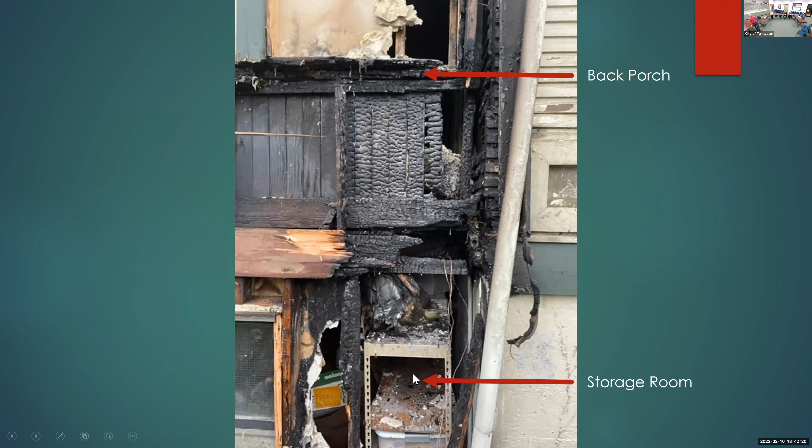So a closer look at the rear part of the fire damage. You can see there's a shelf right here, a shelf unit inside that storage room that had stuff stacked on it, because the wall's gone. The floor to the back porch is right here, the back porch wall, outside.

So this is the bulk of the damage, the floor joists as well as electrical. Again, just another view of that.

We had our staff—part of what we do in our department is also take care of all the city facilities, this building, city hall, these houses. So our facility staff responded that day, even though they had planned not to work on the weekends. They rallied and helped us out and came down and secured the house.

All 4 doors of the house were broken in by the fire department. That's how they do it, they bash in the door so they can get in quickly and assess where the fire is. So they secured all the doors because all the jambs were broken, and then they boarded up the house.

I took a picture of that corner, what it looks like. By the time I got there, it was boarded up.

Okay, so this is the back porch room. And this is where it was boarded up. So you can't see outside, but had it not been boarded up, you would see outside of that wall, out to the grass.

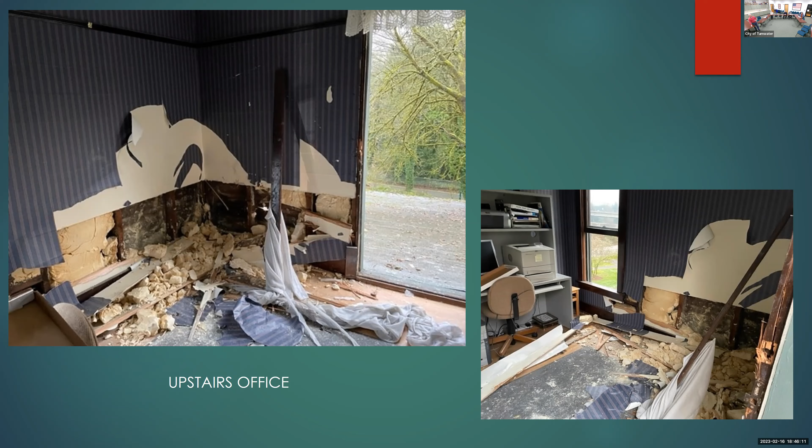So what we did, we wrapped it all up that day. Next Monday, we met with the city administrator and the mayor to do an emergency declaration, repairs, and what that does is it just greatly speeds up our process so that it takes out the requirement that we bid the project, which takes a month or more to go through that. So it allows us to go out and pick a qualified contractor to come in and help us start to fix this. So we also met that day with...

WCIA, Washington Cities Insurance Authority, which is the city's risk provider. We're in a risk pool of cities. They came down and met with us, and they've since met with us again on site to talk about what we can do and how we can do it.

Our insurance coverage, we have $1 million of coverage on the house, both for structure. We have $1 million.

And then we hired Heritage Restoration out of Chehalis. They do this with buildings. They came recommended from WCIA, so we feel pretty good. We just finished the contract with them.

Sam Osborne did last week. So this week, I met with them on site, and we went through the scope of work and the first phase of what they're doing in evaluating the house. So things are just starting this week, and then next week, we're going to start pulling things out.

So the way it's going to go is almost everything on the first and second floor is coming out of the house and going to their storage facility to either be cleaned or ozoned or whatever we have to do to get it clean, because everything in the house smells like a campfire.

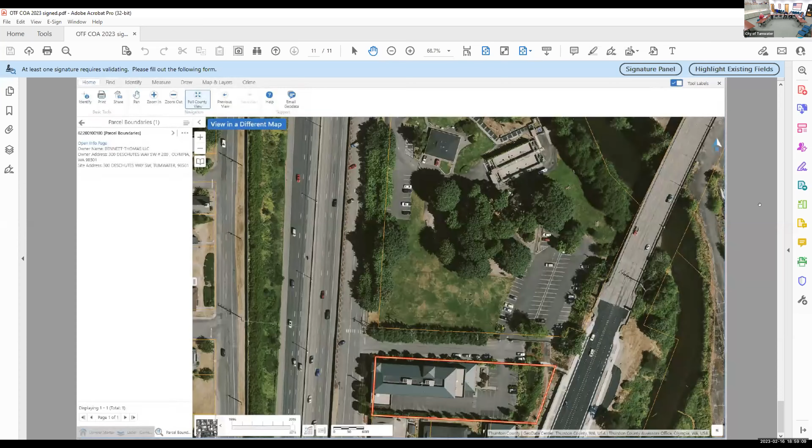Well, first of all, I want to voice my concern for the brewmaster's house, because that's my greatest fear at the Schmidt house, is having someone torch it or get inside and vandalize it with graffiti. We have had several break-ins on the Schmidt house in the past few months. Luckily, we have a good alarm system and good cameras, which cost us over $50,000 to implement over the years. But it has proved beneficial, and the Tumwater police are very good about arriving quickly. I don't know why, but the transient activity has picked up the last week or so. I don't know, maybe it's because they're moving them out of their camps along the highways in that area. I see them every night, coming around the house, walking through it and looking at everything. So I'm still in fear of that happening.

So I'm sorry that happened to the brewmaster's house, but like Chuck said, what are you going to do with a guy? Someone wants to come up and light something on fire, there's not much you can do to stop it. Just react. So anyway, we'll do what we can to help out with the brewmasters.

I don't know if Chuck has announced this or not, but Megan Ackerman has left to take another job, so she's no longer with the foundation. But we have hired Ed Eckley, who is another historian in the area. Chuck met with him last week or earlier this week, I can't remember. He seems to be a good guy, a good fit, has lots of social media background, and is looking forward to helping out.

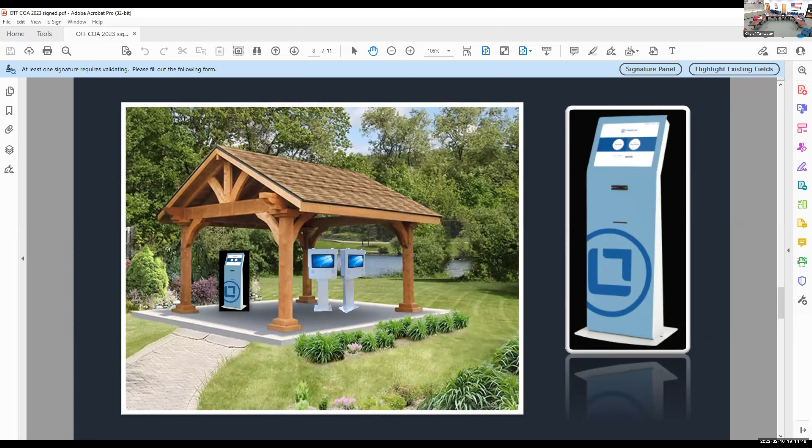John, how soon will this get done? Well, it'll take 3 months or so to ship it, and after that we plan to have it up by summer, by the start of summer. Let us know when you have it, so we can have a big party. We might put a keg in there too, but do I need an amendment for that, kegerator?

Anyway, all right, thank you very much. You're doing a good job. Well, thank you everybody, and sorry about the brewmaster's house again, but I feel your pain, so. Anything we can do to help, counting on you to take care of it. Yeah, anything we can do to help out the Foundation with anything at the brewmaster's house, we're happy to do that. We appreciate it.

Just a quick update, we are renovating the Schmidt House and really revamping the archive rooms downstairs. We got a grant from the Washington Historical Heritage Fund. It's going to be climate controlled, and it's going to have fire prevention throughout the whole house. So we can give you some lessons learned on that after we put it in. When are you going to have it finished? Hopefully by June.

Okay, so June for the Schmidt House, and how soon for the kiosk, that summer as well? Yeah. And then we got the park, maybe we're still talking about. Okay, yeah, when you have the house open, I'm sorry, what? Maybe we can have a meeting at your Schmidt House sometime after you get it all completed and furnished and what have you. Yeah, absolutely, we'll give the grand tour. I also wanted to point out real quick that when I read the minutes before the meeting,

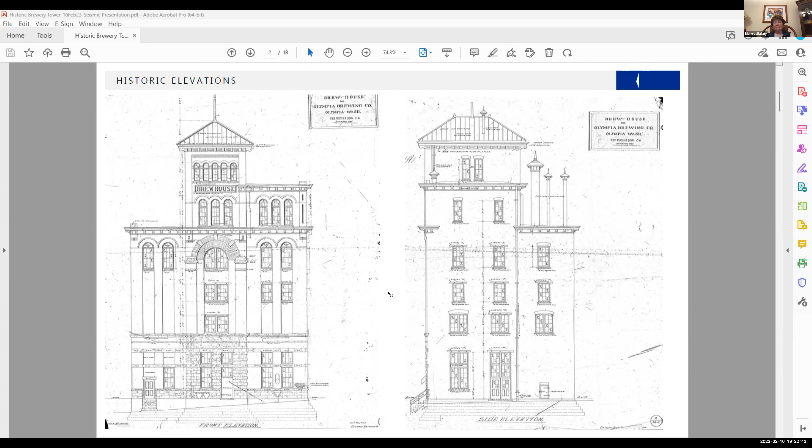These were the building elevations, and we've pored over these drawings quite a bit, even recently, just to understand how the building was put together. We'll spend a lot of time today on the areas at the bottom, the foundations. These were probably designed in Milwaukee for a site they knew would be a masonry building, very heavy. So these pyramidal shaped footings were common for displacing that weight onto compacted soils.

That's not what we have though here in Tumwater.

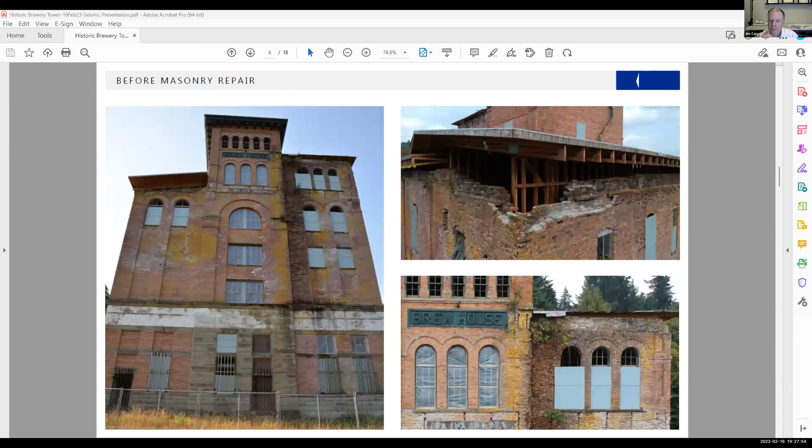So what we think happened - I'm going to scroll back to these drawings - they anticipated hitting suitable soils, or they would have anticipated hitting bedrock, the basalt, which as I'm sure you know, is what creates the falls right there. There's a big plug of lava rock, and I think they anticipated hitting that lava rock as a suitable base for this heavy masonry building.

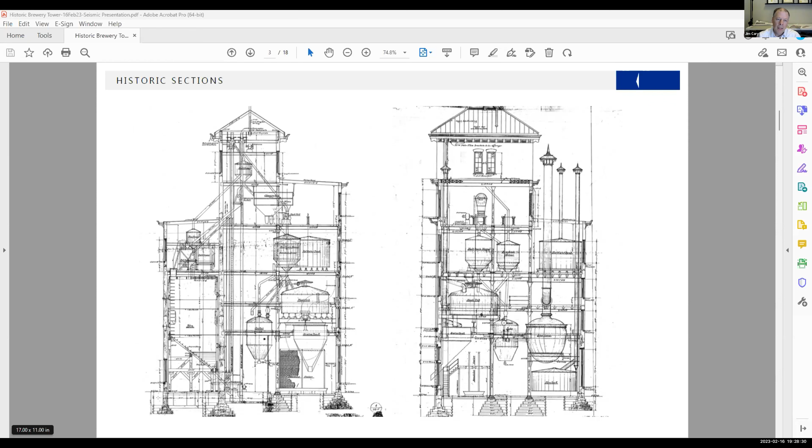Going back, they would have started digging a hole, basically the space for this building. They dug down, and in 1905 they might have been using steam shovels - I don't think they would have been doing this by hand. They dug and got down probably about 8 feet, and they ran into a lot of groundwater, which is the groundwater that is in the crawl space.

Now, they dug more, and they hoped they would have gotten to the basalt, but they didn't make it, and they couldn't keep up with the amount of water down there. So this drawing is a hand-drawn drawing that is in the archives of the Tumwater Foundation. They kindly dug through, and we located this, and this is the holy grail of this project.

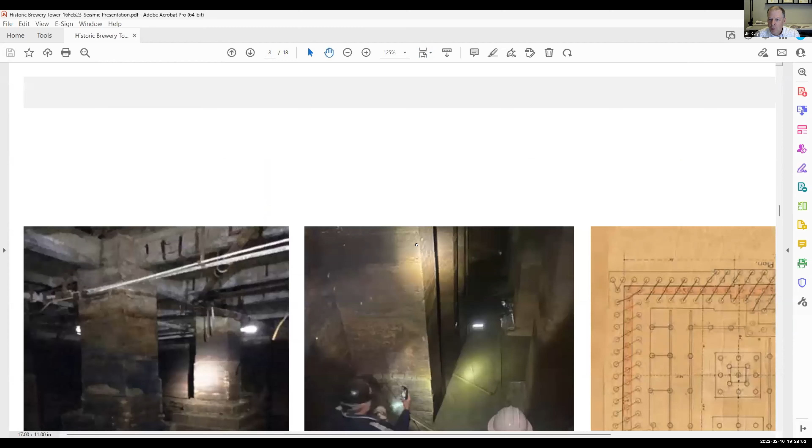What it shows is the foundation plan as drawn in Milwaukee. I'm going to zoom in - hang on, give me a second. It's supported by about 490 piles, and these piles have a line drawn across them. This is like a linking piece of steel across these piles.

They just got to a point where they couldn't keep up with the water, and they realized they needed to support this building in this location. So they came up with a piling plan - these are likely Douglas fir trunks of trees. They would have been driven down to resistance, so they drove them down until they hit basalt. What's interesting is, based on our geotechnical borings, these piles are probably only about 10 to 12 feet long.

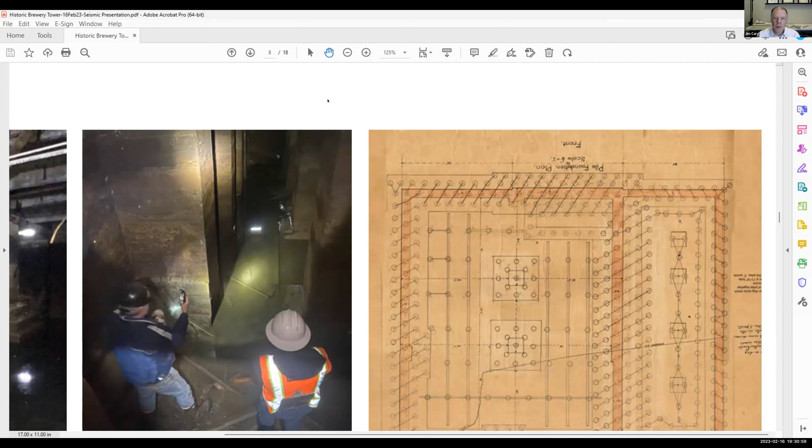So they have this hole filling with water, they drove piles, then poured the concrete foundation on top of those piles and continued with the concrete and finished the building on top. This has significant consequences for the seismic mitigation we're anticipating for this project. This was a big day for us getting down there, measuring what's down there, seeing the underside of the structure from below, and seeing all these piered foundations sitting on top of the timber piles below.

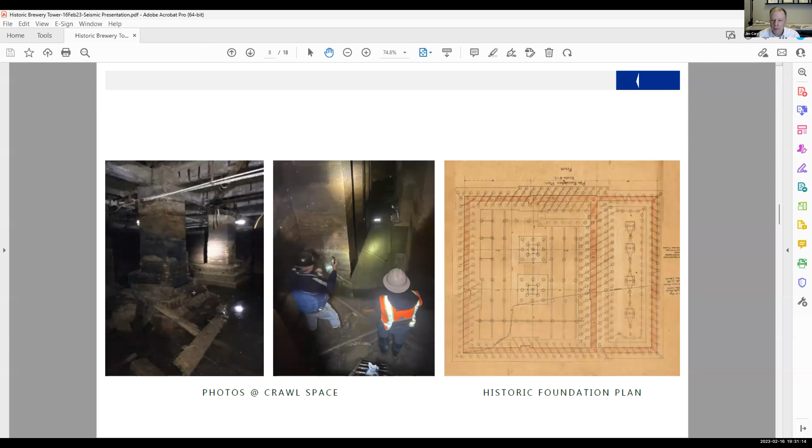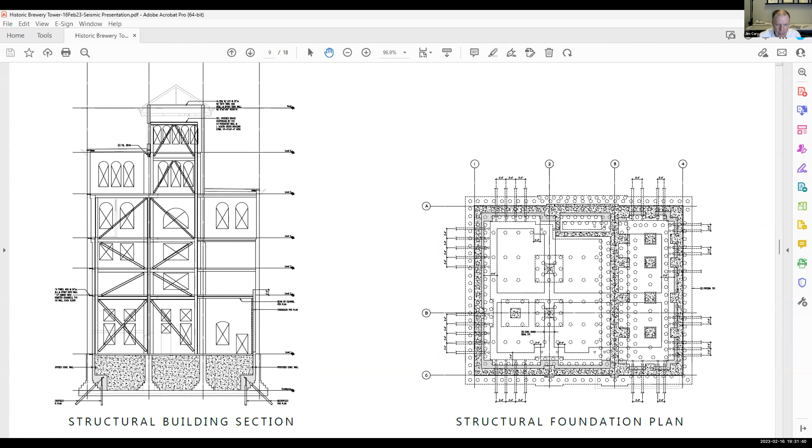So these are the new structural drawings. I'll zoom in on the section here, give you a closer view. This is the building section on the left, and what this shows is this crawl space - this is where we were standing down below, about 14 feet tall. It shows the foundations and this big mat slab they would have poured on top of it, and starts to show the structural changes we're anticipating making to make this building safe to occupy. The plan over here is the foundation plan again, showing all these timber piles below.

And then you can start to see these pieces here. These are new, they're called micro piles, and they are cored with a casing, and then they drill until they hit resistance, which will be the bedrock down below, and filled with rebar and concrete, and then capped and tied to the new concrete that we're attaching to the inside of that crawl space.

So what we'll do is drive these micro piles, some vertical, some diagonal. We'll pour concrete in the crawl space area, not fill it, but along the walls to create shear resistance. That concrete will be tied into new concrete walls on two of the tall floors at basically the ground level. And then from there, we will use a series of steel members that go up through the structure up to the top of the tower.

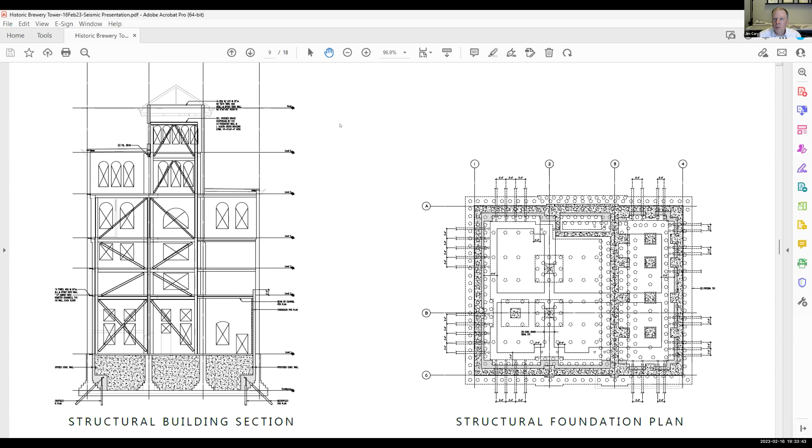This is the sort of standard way that we do seismic mitigation design, by collecting the shear forces at the base, getting tied into the ground below, and then using steel members to absorb the forces that continue up through the structure. And I'm going to switch to a video here briefly.

I like to use this as an example of what we're working on. So this is not meant to look like the tower, it is a structural representation of the tower. And if you put it in motion, it starts to show how the building reacts.

One of the things that we're working with is this space here at the bottom. This is that tall brewery floor. I'll run it again here. And you can see there's a lot of movement there. And then there's just this heavy masonry mass at the top that moves back and forth.

So what we'll be doing is capturing all of that energy down here at ground level, and then using a concrete and steel structure to absorb that force and make it so that heavy movement does not overwhelm the existing masonry and our new structure inside.

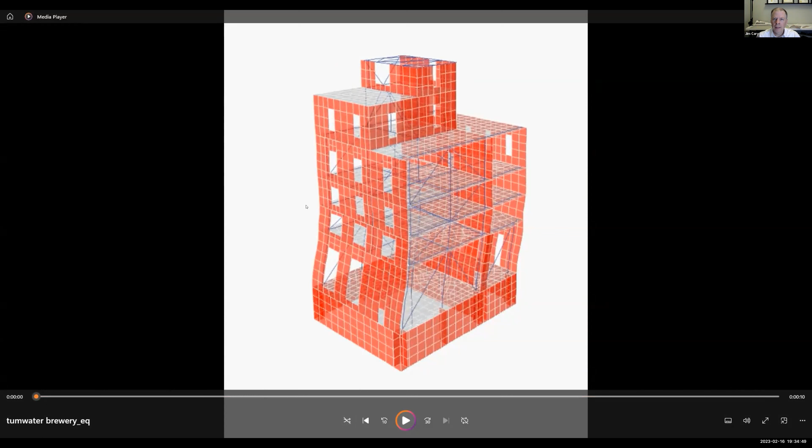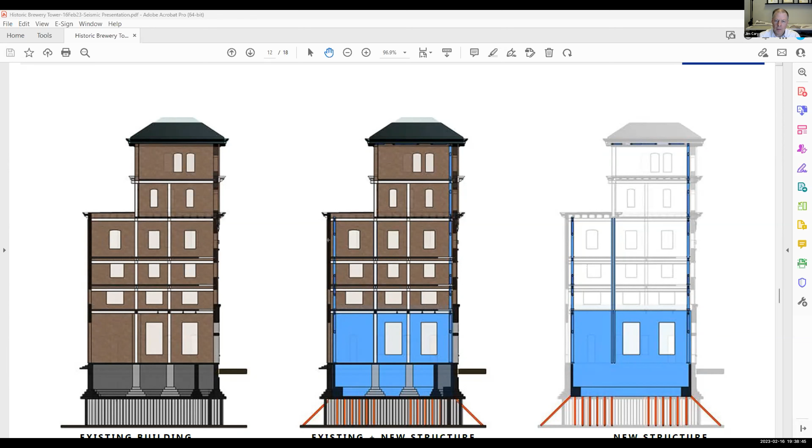And then structure going up the north wall, structure going up the south wall. This drawing is looking at... let's double check here. This is looking at the south wall, the back of the south wall, with concrete here, crawl space, concrete here, and then framing going up, that with some struts up at the fifth level.

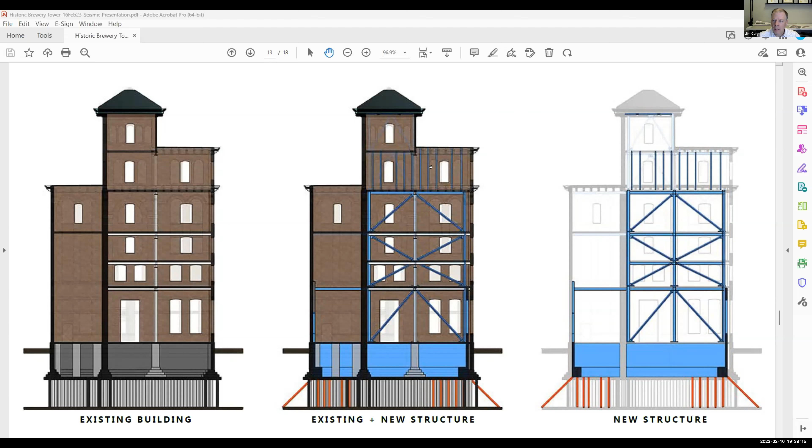And then this is looking at the back of the east wall. So looking east, this is that tall room where the grain storage was. And once again, concrete going up about half of that wall, concrete down in the crawl space, and then micropiles below.

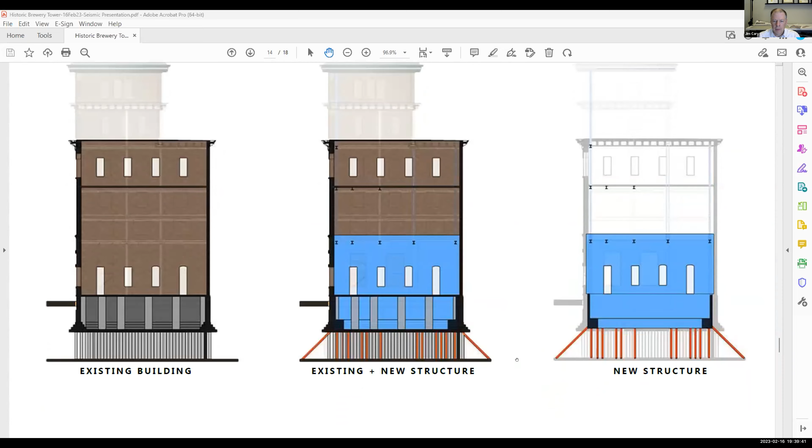Yeah, I think that covers the scope. This is relatively standard practice for seismic mitigation. You use concrete where you need it, reinforced concrete where you need it, and then steel structure to absorb the seismic loads as they accelerate up through the top of the structure.

The criticism that I would expect is that we have steel members that are crossing in front of windows. You can see them here at the sixth level at the top of the tower. This is at the fifth story. Once again, at the fourth story. And then as we go down through the building, these diagonal members cross in front of the windows.

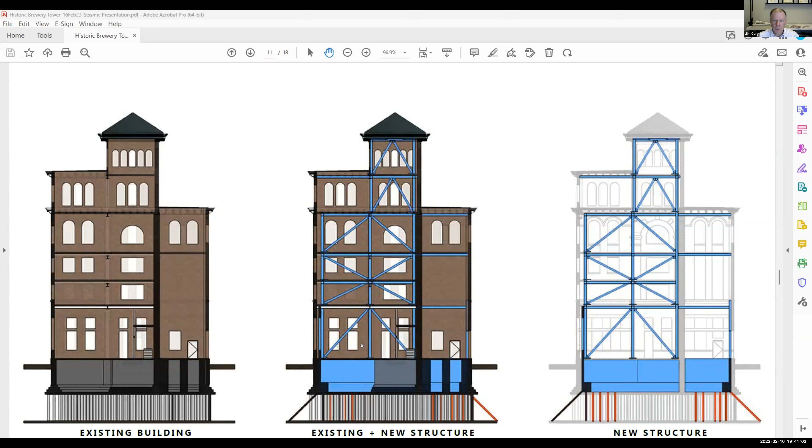This is typical seismic mitigation. There are ways to limit the amount of steel that crosses in front of windows, but it tends to increase the amount of steel that you use. It also increases the cost of the project. And we have shown this as the most efficient path to take those loads from the top of the tower down to the base of the building.

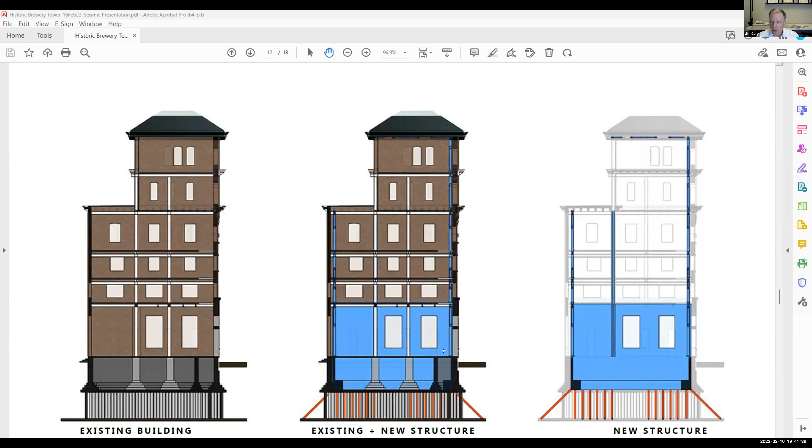The other thing that I would expect people to comment about is the use of concrete shear walls down at the main level of the building. Down in the crawl space, they won't be visible, and eventually the water will return and they'll be submerged again. But at this level, the wall of the west wall of the fermentation room would be a new concrete, reinforced concrete wall that was part of the structural reinforcing of the building. We also have that same wall on the east side of the building in the grain room as well.

So that is an introduction of where we are to date. We're at, I think technically the architects, my office, we're at the end of schematic design. The structural engineer had to go quite a bit further in his work just to get to this point, where we can analyze the forces, coordinate it with the geotechnical engineering, and get a design put together that meets the current building code.

And why don't I stop now and answer any questions related to this scope of the work, and then I'll follow up with what we're using as a placeholder for future uses of the building. We've done just a bit of design work to understand what we intend to do so that the structural engineering supports that and would not be in the way of future programming.

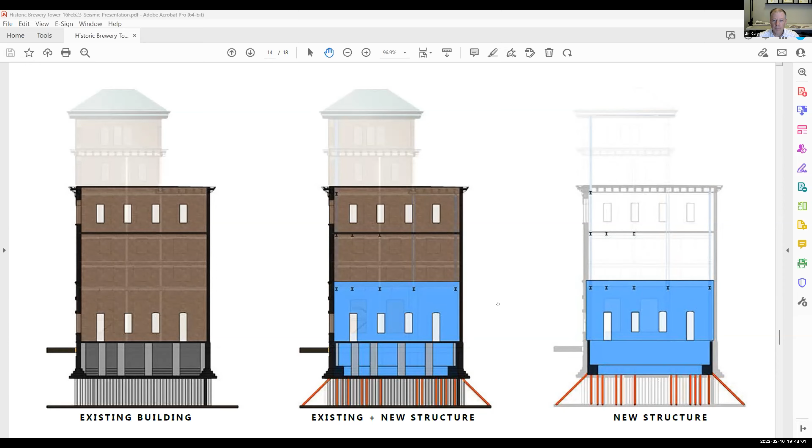Jim, if I was walking into your new structure after completion on the interior, what would I see? You would see the existing masonry building behind the new steel structure. The steel structure would be limited to the inside the north wall and inside the south wall. And you would see new concrete, reinforced concrete walls on the west side and east side of that ground floor.

So basically, I would see inside the tower or inside the floors an internal seismic structure holding up the building? That's correct. And the building is still technically holding itself up. This structure is designed to keep the building from, it's not going to tip over, but the forces of the earthquake accelerate through the building, and it would basically pull itself apart. The roof structure and the components, as you go higher up in the building, as the energy accelerates in an earthquake, would fall apart, and there would be parts.

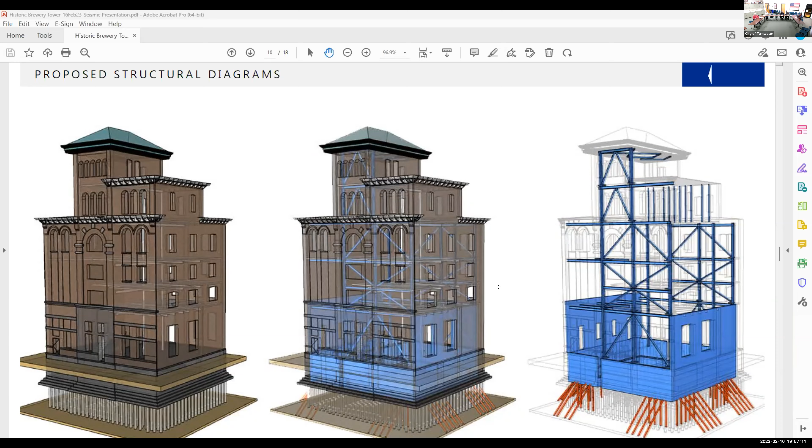I have a couple more drawings. If everyone wants to sign off, I'm not sure what time it is, but I've got a couple more drawings that are relevant if you're still on board. Can we have a show of hands of commissioners that would like to see just a sneak peek at what future use might look like from a building perspective? Yes. Yeah. Yes. All right.

So we're not trying to win this project with fancy drawings. What we're trying to do is explain, so I'm going to zoom out again here. We're trying to explain how this building works with the building code and how it would work for somebody to actually occupy this space.

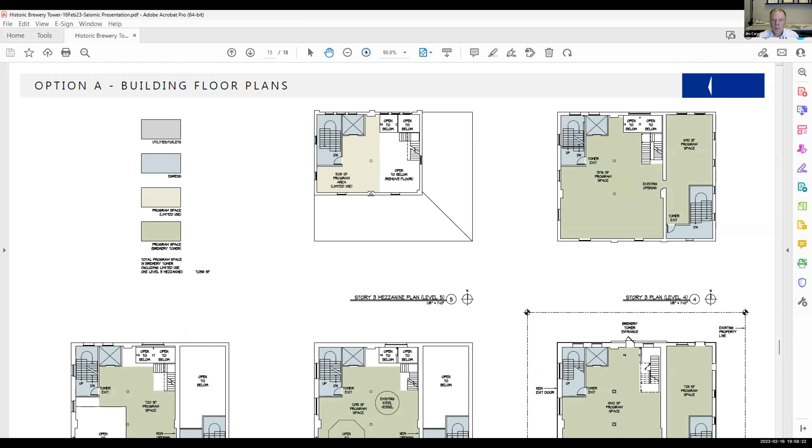So what these drawings hopefully illustrate is that it was a great building for vertical gravity brewing, but it does not work well for occupying it here in 2023. So this is the floor plan.

By the time we put in legal stairs that wind back on each other, legal stairs here and potentially an elevator here, the original elevator location is too small. We really start to eat up the floor plan and take away from the quality of the building space. We just fill it basically with access.

Moving up through the space on the second floor, we have to provide stairs and access through, and then bathrooms. There's very little building left by the time that we create all the things that turn it into a building for 2023. As you go up even further, it just becomes basically an access tower.

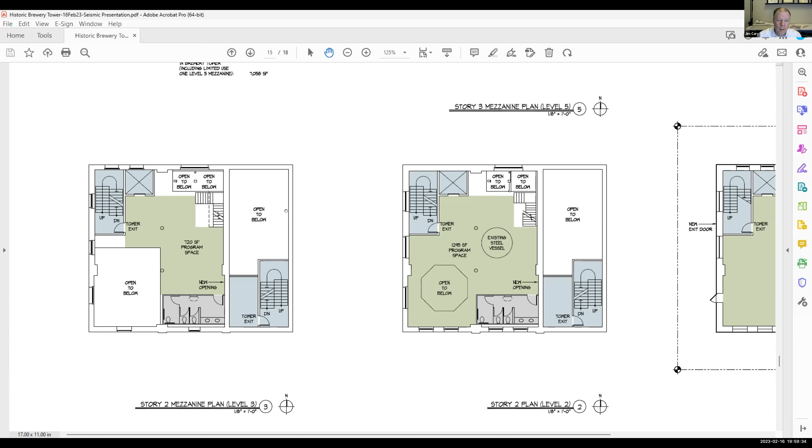So stairs in blue, green is available program space. These are existing openings in the floor. This is level 4. We get a little bit more space up here, but level 4 is technically the end of our legal stairs in the building.

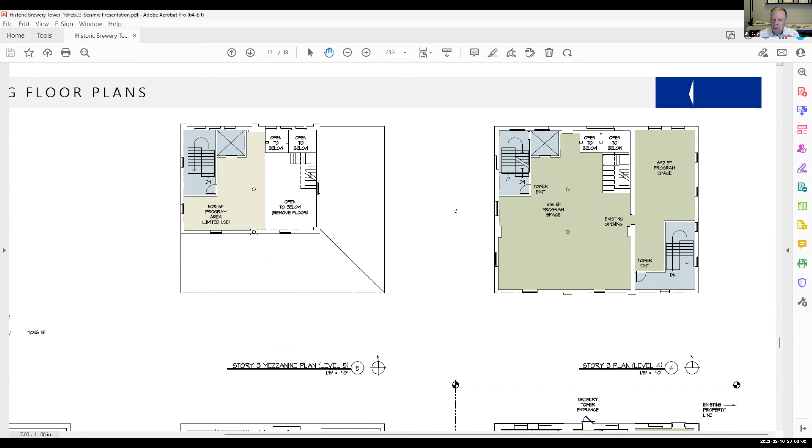If we include fire sprinklers and use the existing building code and the new building code, the current building code, we literally run out of legal access to these spaces in the building. So we're getting up towards the top of the tower now. So we did this drawing to illustrate that we're going to need to be more creative than just moving into this building.

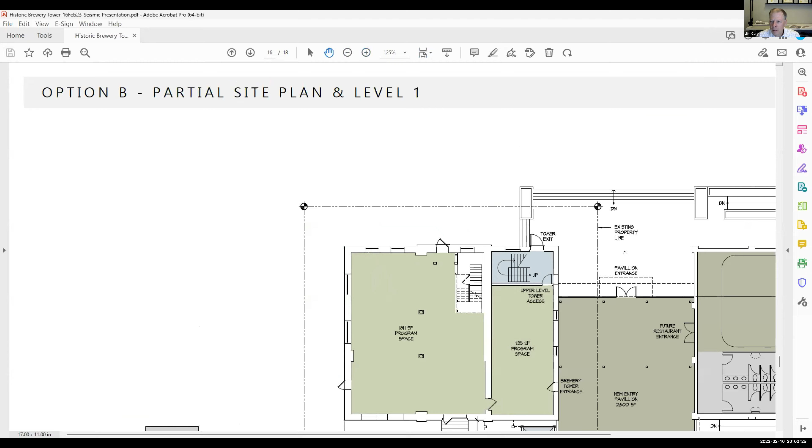So we did a second version that, zoom in again here. Sorry for the motion here. Let's situate it. This drawing shows the tower here on this side.

It shows one stairway climbing up through the grain room, and then an elevator and a stair outside the building. It shows the concrete structure that's to the east, off to the still to the east, staying put, and then we build an entrance pavilion that connects the two buildings. So here's the tower.

Capitol Lake is off to the top of the drawing. Here's the concrete building, the old warehouse to the east, and then we would build a connection here so that you would enter the building from grade here.

So climbing up from grade up to a pavilion entrance, enter the building, and then you would have access to the building to climb up either from the elevator or these stairs, and then we imagine this as a restaurant on this side, with bathrooms and kitchen. These bathrooms would also serve the tower so that we didn't have to use program space, which is limited over there.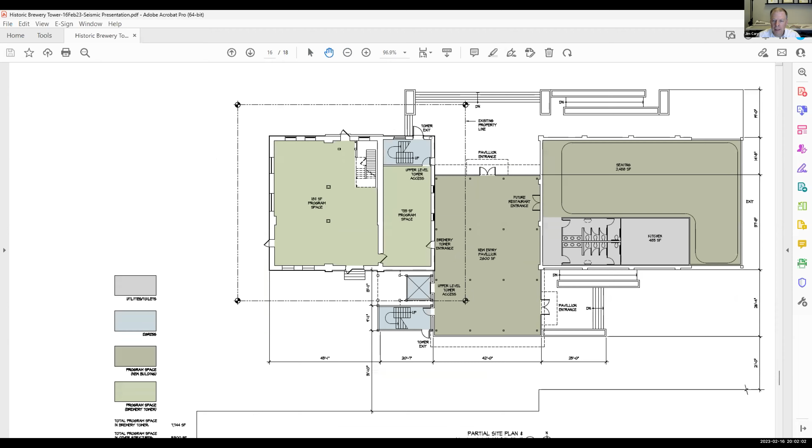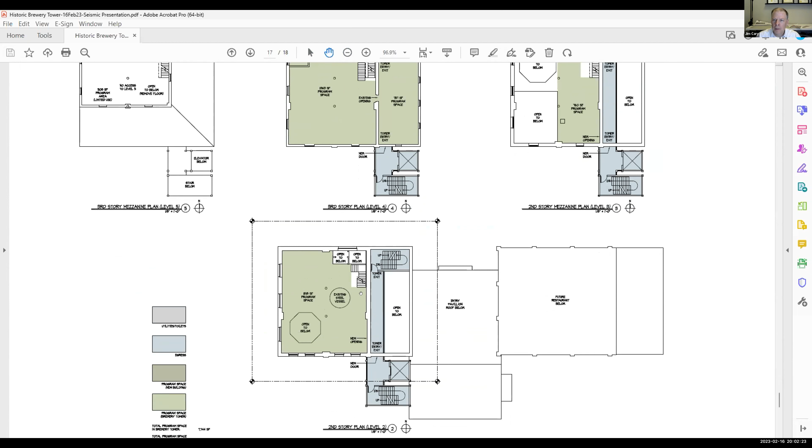And then it really, the amount of green space, which is the program space in the tower, we maximize that. So this is the ground floor of that. Climbing up through the building, you can see this is the second floor. This would be the access tower, so we'd have stairs here, elevator here, a walkway through the middle, and then we have a lot more program space available in the historic tower on that floor. As you go up, we maximize the amount of usable floor space within the tower. And then to help you visualize it, we did a 3D version again.

I'll zoom in down here at the bottom to start off with. So here is the building on the right, maximizing its open space and use. We would build a simple pavilion, likely a lot of glass, that connects the two. And this is the concrete building to the east that is possibly a restaurant. We would connect it all with the plaza to get you up to that grade level and into the building and then into the space on the right.

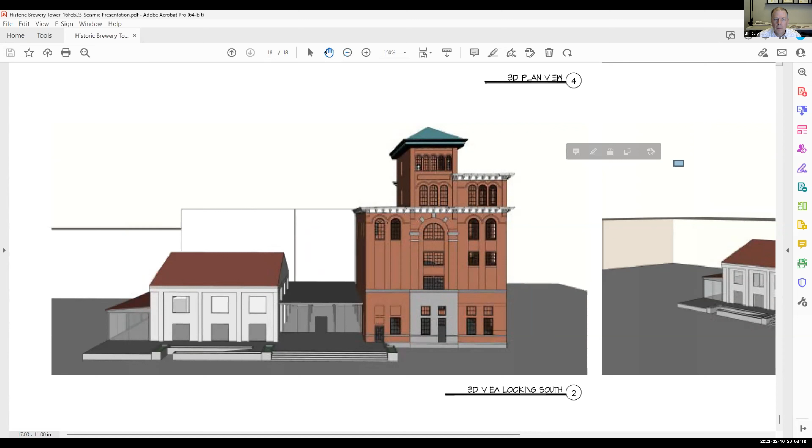Does the city now own the other building, or no?

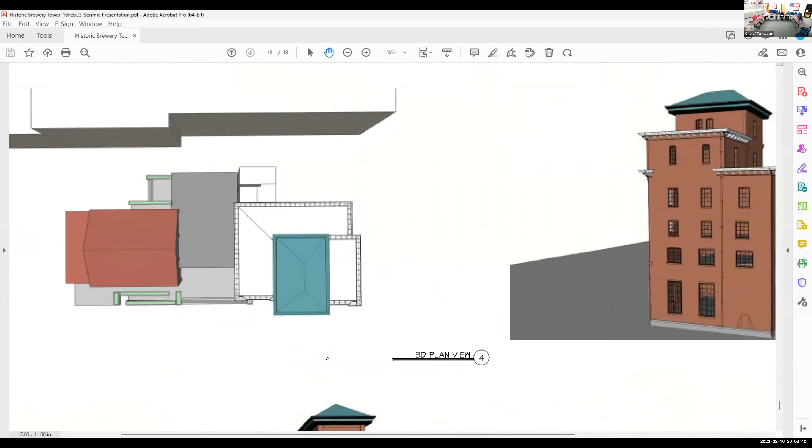Yeah, Jim, so it sounds like a great idea. Now we're going to have to concentrate on preserving and utilizing the tower. You got 10 million owners that want a whole lot more money than the thing is worth to build it into the warehouse area. But it's a nice idea, and it certainly makes the tower more usable. You haven't talked about accessibility to the buildings and parking, but that's another story. And what are you going to do about the springs that are in that Capitol Way area? I forget the name, where it's located for sure, but you have a lot of water coming out of the hillside there.

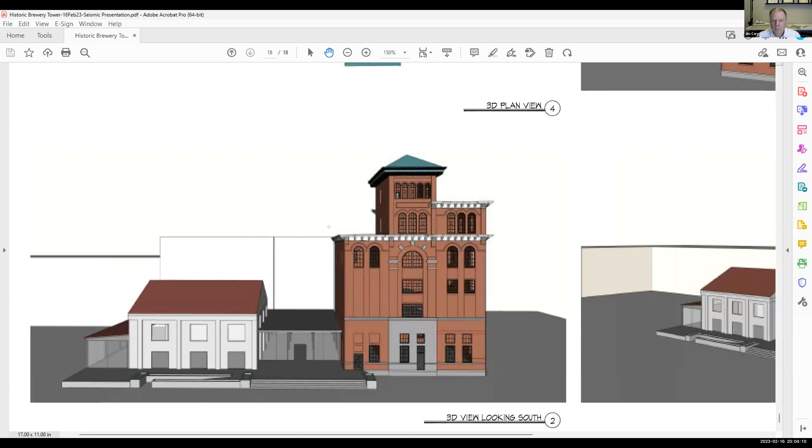So the reason that we did these drawings was to have a sense of the future of this project, so that the seismic work we're proposing is not in the way of that, and that it makes sense that the seismic work is in the right spot and doing what it needs to do. We just felt like we could create a plan for installing seismic mitigation into this building, but not without at least some sense of what the ending might look like. Without a sense of this, we weren't sure we were putting it in the right spot. So that's the whole reason that we did this scope.

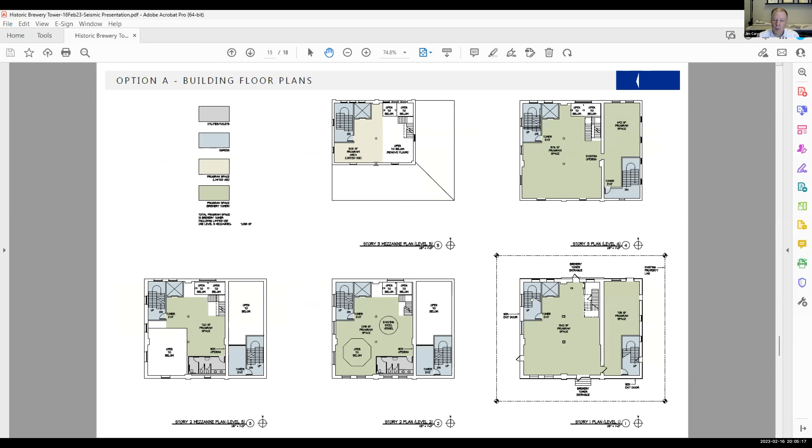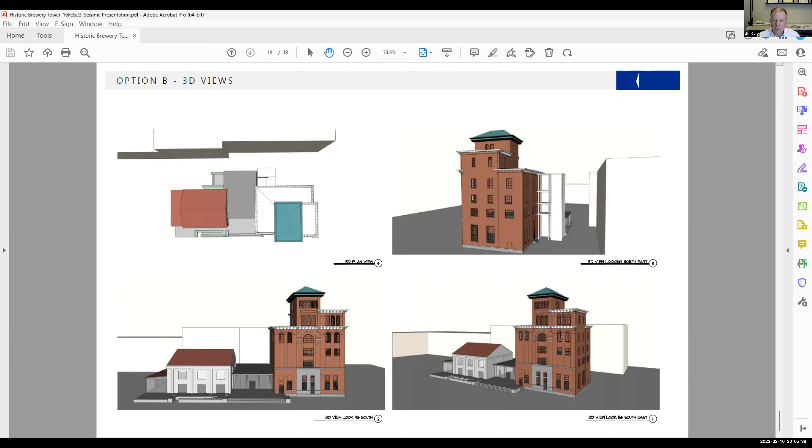I'm not trying to sell you on a new project, we're trying to just pay for the current one, but I did want to give you a sense of where it might go, so that we understand if we did want to do this type of project, we would want to know where all of these pieces were before we did that seismic work. With this type of project, we're a lot freer to put that seismic work in the right spot and know that we're preserving the building, making it so that there is a way to build this in the future. So that's why we did this programming scope.

I like the dreams. And Charlesford's great grandkids will hopefully see that and pay for it.

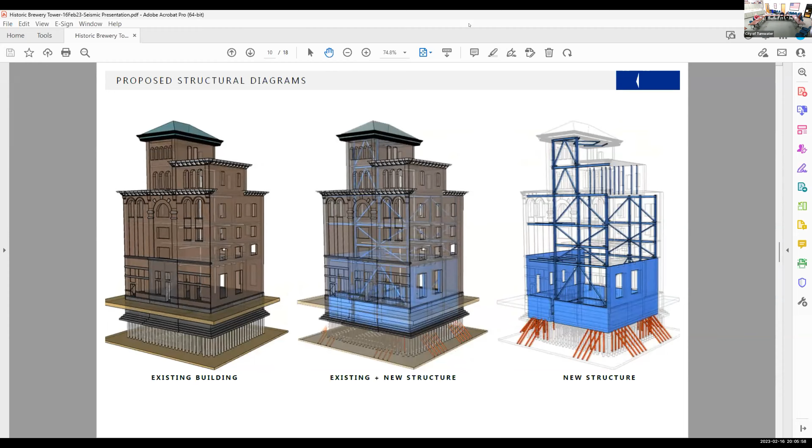Commission members, are there any comments or questions you'd like to make at this point?

Yeah, I'll go. Sorry, should I continue? Yes, go ahead, Alex. It'll be quick.

I just wanted to say thank you to Jim for the awesome presentation. Everything makes perfect sense, which I was not sure would be the case. I thought maybe this would get more confusing than that. I think the design is beautiful and simple and makes perfect sense. And I appreciate your forethought in coming up with questions that you thought would come up. I found that really helpful.

I'll just go ahead and speak to those two things super quickly. The steel in front of the windows is perfectly all right with me personally. But I think the discussion of the interior concrete was somewhat fruitful in this meeting. I too would lean toward preserving the actual tiles if possible. Otherwise, I had just a couple of quick ideas to put on the record. Maybe it could be a good place to show projections of videos for educational purposes, or perhaps the concrete could be stamped in a pattern that was suggestive or reflective of the old design. But anyways, I just wanted to say thank you for thinking of questions and anticipating them.